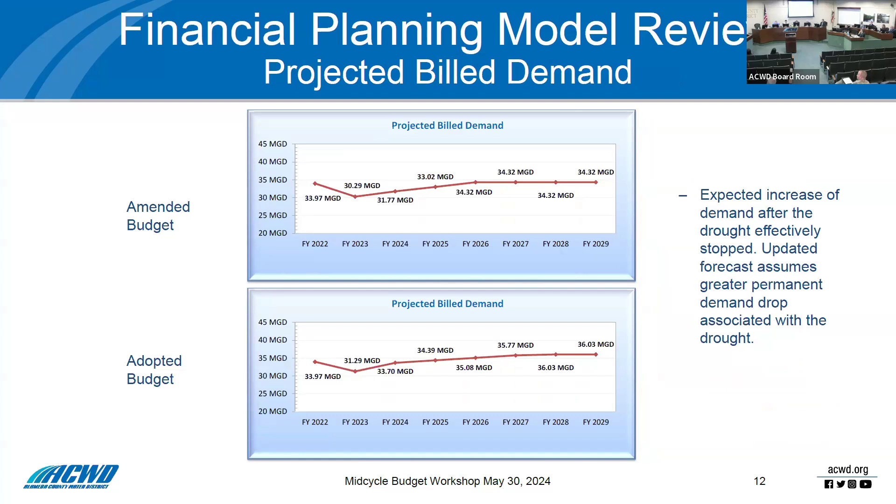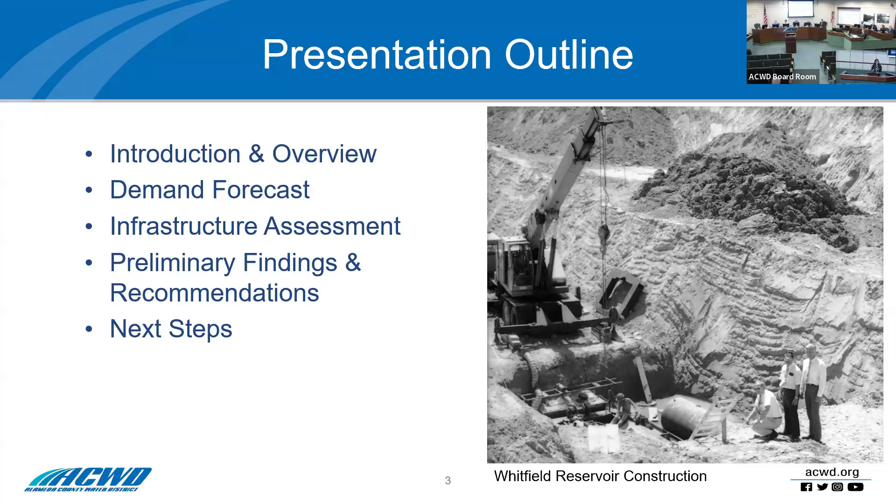Next, Rosie Chan will walk us through the supply-demand gap analysis, our infrastructure planning process, and our preliminary findings and recommendations of the engineering report. We conclude the presentation with some proposed cost packages and next steps.

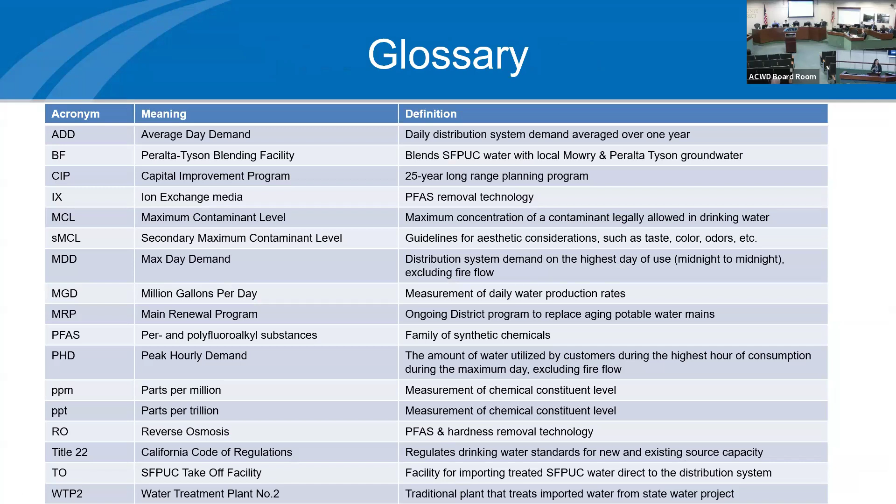The main purpose of today's presentation is to provide a transparent view of the engineering analysis and draft project proposals and their associated costs. It's important to note that not all projects included in today's presentation are included in the CIP recommendation we brought to the board last week. After a thorough financial evaluation, only approved projects will be incorporated into the future CIP.

Today's presentation also includes review of our infrastructure planning criteria, which is really driving our project selection and prioritization of projects. We will be upfront with the associated costs for each of those projects. Our goal today is to provide complete transparency about the proposed projects and their costs associated with the findings of the engineering analysis.

The engineering report is a snapshot of our current capacity constraints, which is primarily focused on the near term, a 10-year horizon.

The engineering report fits within a larger planning process. We have a planning portfolio process which includes several planning documents: the asset management plan, our main renewal program, water resources master plan, and our 5-year strategic plan. All of these inform the engineering report and look at a longer term outlook.

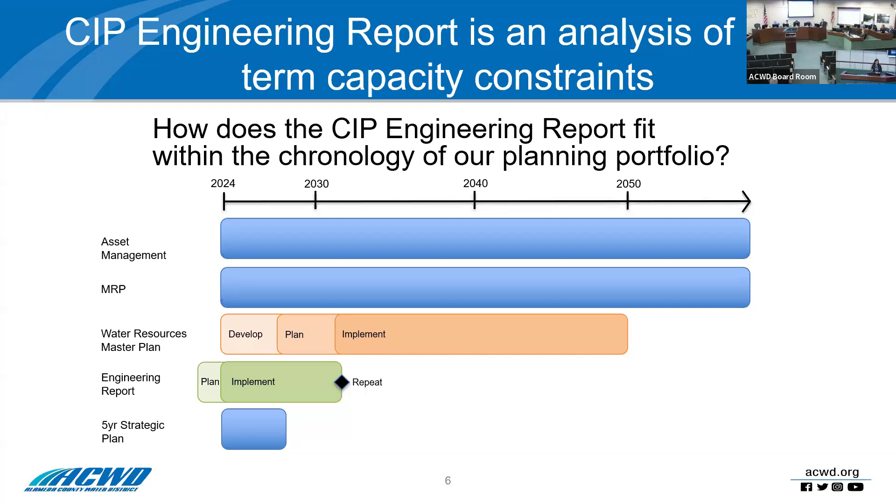I'll provide a quick overview of the scope of the interim CIP engineering report. This interim report is focused on detailed analysis of current and projected infrastructure needs across various aspects of the water supply system.

More specifically, we are focusing on 4 facility types: production facilities, storage facilities, pumping and boosting facilities, and transmission mains. As we go through the analysis, you'll see different sections focused on these 4 facility types.

We also looked at our demands. The report considered capacity - the current capacities - with 10% contingency for the demand in the next 10 years, and with water quality considerations.

The infrastructure needs to be able to withstand disruptions and provide continued, reliable water supply to our customers. With that in mind, this engineering report also evaluated resiliency under normal operation and redundancy scenarios for outages to major production facilities or water supply sources.

As we go through the analysis, you'll be able to see the resiliency options under normal operation and a couple of redundancy scenarios. This report identified gaps between current infrastructure and our projected needs over the next 10-year duration.

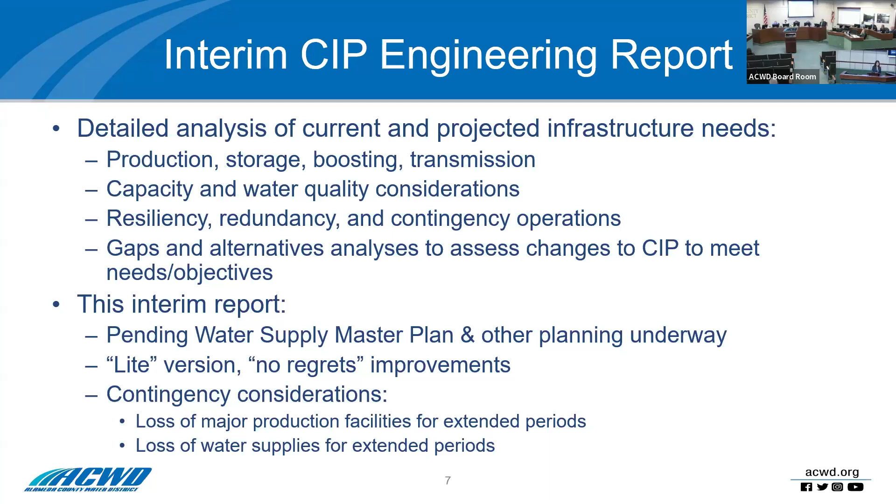The first step in the process is criteria development. There are 2 groups of criteria: regulatory and district non-regulatory criteria. During this step, we review prior engineering reports, relevant documents, references, and acquire stakeholders' feedback to understand current challenges.

The next step in the process is gap analysis. During this process, we collect necessary information and perform the preliminary supply-demand gap analysis. We additionally perform feasibility analysis for redundancy and reliability scenarios.

During the gap analysis, we identify various production scenarios for hydraulic modeling analysis, which is the next step in the process. The hydraulic modeling is then used to make sure demands are not only met quantitatively, but also geographically across all the pressure zones within our distribution system.

Hydraulic modeling uses the various production scenarios developed from gap analysis and models the results. Based on the hydraulic modeling results and gap analysis, we identify the CIP improvements needed to meet the demand.

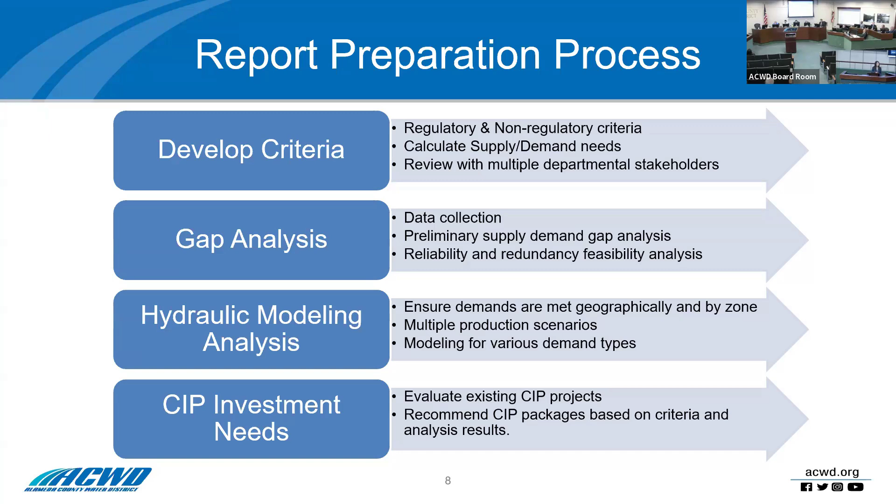So as I mentioned earlier, there are 2 groups of criteria being developed. Regulatory criteria are based on Title 22, which include max day demand. Title 22 requires the public system shall have the capacity to meet the max day demand at all times. Peak hourly demand, the PHD, Title 22 requires systems with 1,000 connections or more to meet 4 hours of peak hourly demand, but the PHD can be met using storage or emergency connections. Additional regulatory criteria include fire flow and minimum operating pressures in the water mains.

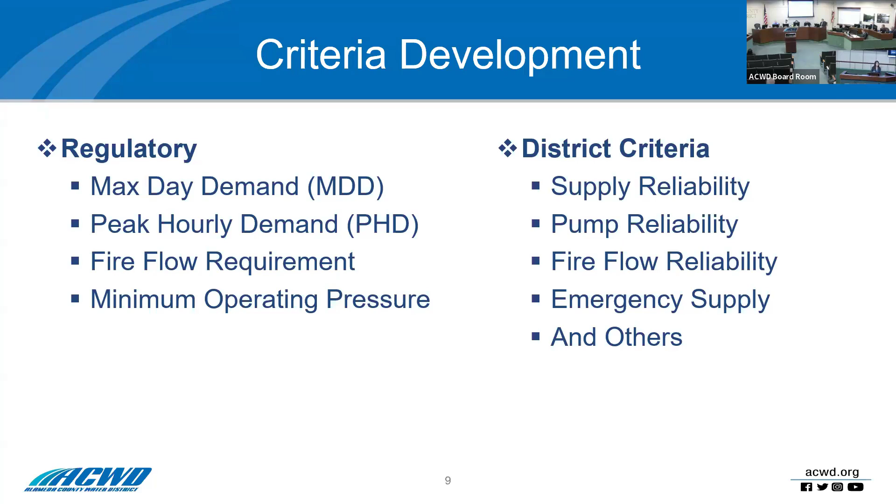So non-regulatory criteria are district ACWD internal criteria based on level of service goals. We'll look at these various district criteria in the next slide. Any questions? So here are the ACWD internal criteria.

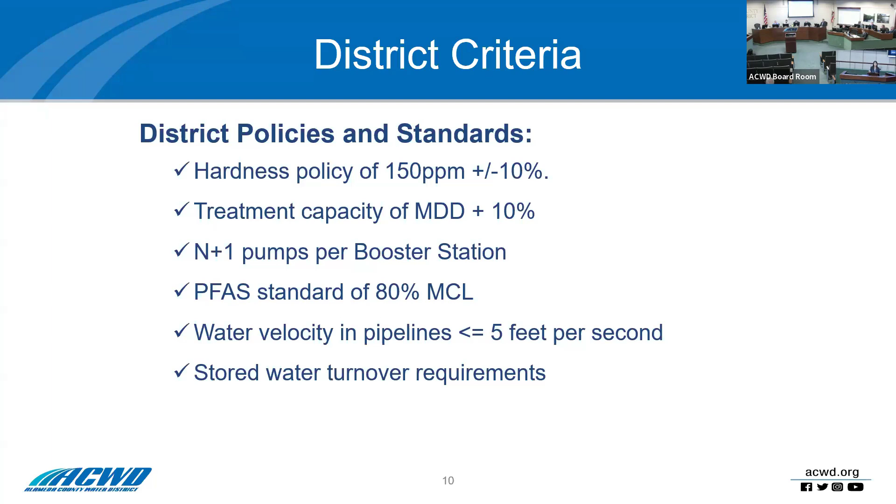The ACWD criteria are based on district policy, standards, and guidelines. These criteria include hardness policy — we have to stay within 150 ppm plus or minus 10% tolerance. Treatment capacity: we have to meet MDD plus 10% district contingency, maintaining one pump on standby at all the booster stations for emergency. We have to meet 80% of PFAS MCLs. All of our water mains shall have velocities no more than 5 feet per second. Our storage facilities shall maintain a turnover of no more than 7 days, and time-of-use pumping for energy cost savings. These are all the major internal criteria for ACWD.

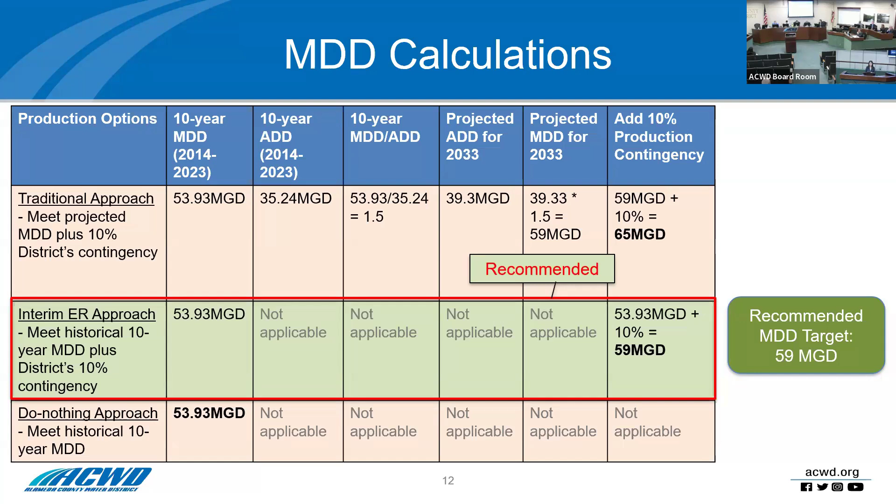Okay, no, fine. Thank you very much. All right, thank you. Let's keep moving on.

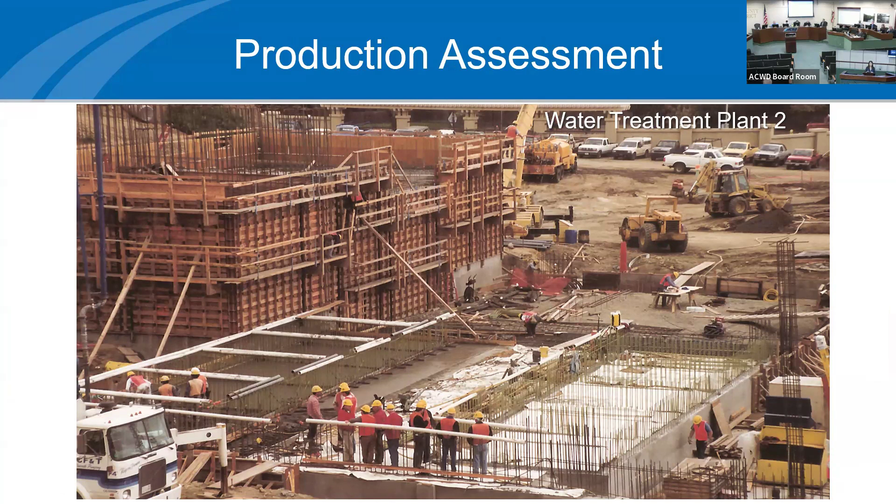So this presentation, the assessments are broken down into 4 major facility types. The first facility type is the production facilities. We'll take a look at the production facilities assessment in the next few slides.

Design capacity is the rated capacity of a production facility as described in the permit and amendment document. Contractual output means maximum available output according to the water supply agreement — for example, our daily maximum capacity we can take from San Francisco is 24 MGD. Sustainable output means the operationally proven production that can be maintained long-term, or in other words, the production rate a plant can sustain without causing any issues.

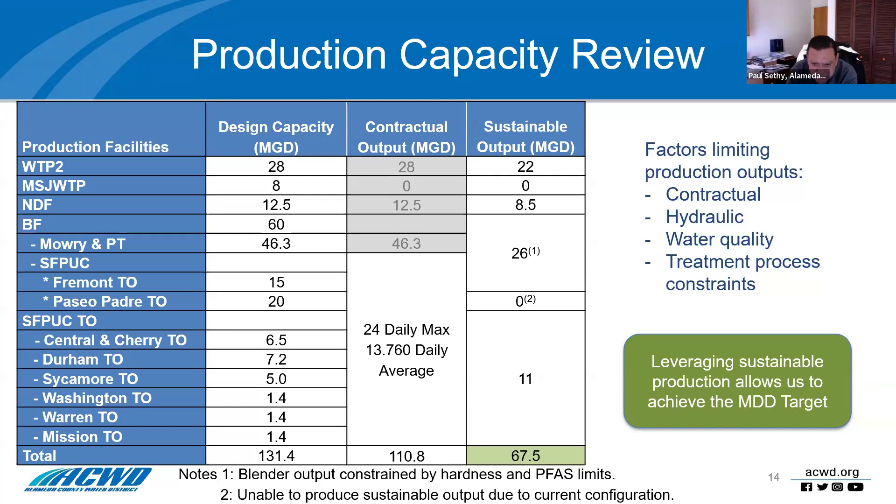I have a brief comment, Rosie, just because believe it or not, this comes up here once in a while. I want to emphasize on this slide you see, for instance, 22 MGD as the sustainable maximum output of water treatment plant 2. Just to drive home that we could not operate TP2 at 22 MGD continuously, even though it says sustainable. The littlest things, like a taste and odor event or algae in the source water, always require adjustments within the plant. We've got to increase our ozone concentration relative to plant flow. Things like that, those operational adjustments are done all the time, along with maintenance on solids handling processes. So that's the maximum sustainable output we'd gear up for a maximum day event, but we can't run that plant continuously at 22 MGD. These numbers are not cast in stone.

All right, thank you. I'd also note that your hardness criteria of 125 is below the MCL criteria, so that's another point of flexibility. Hardness is 150 plus or minus 10%. Yeah, and there's no MCL for hardness, it's an aesthetic thing. That's why we have to set our own internal standards related to keeping a uniform hardness across our service areas, something that's aesthetically as good as we can make it. Since we're looking at peaks, it's an issue, it's not the average or mean. Thank you.

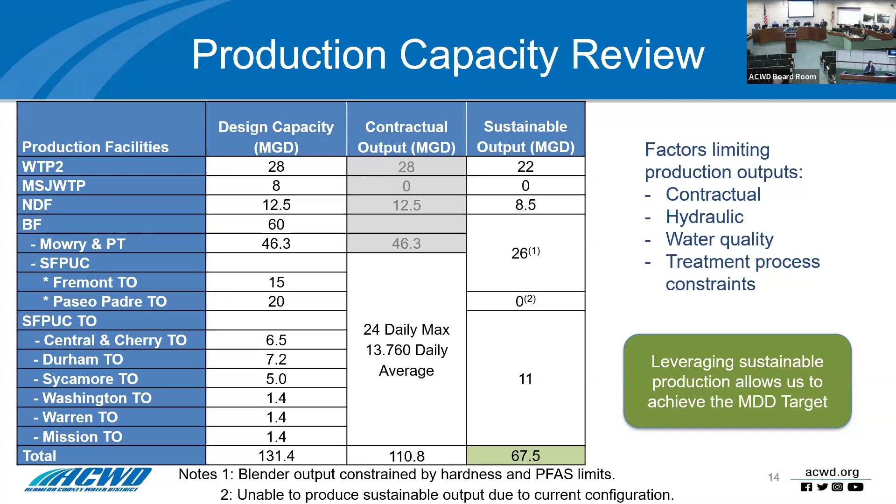All right, moving on to the next slide. So you saw the sustainable output for all the production facilities. Here, this slide shows the combination, the most cost-effective combination with all these production facilities combined. I also mentioned earlier that the blending facility can range between 21 and 26, depending on what San Francisco hardness is coming into the blending facility. Our objective is to meet the 59 MGD max day demand, stay below the hardness policy, and meet the MCL for PFAS regulations. These are our goals. With that in mind, the important thing to note is that we will be able to meet max day demand of 59 MGD under current conditions. But I do want to review why I said 21 MGD for the blending facility, limited based on San Francisco hardness.

So this slide we'll take a look at. I'd like to take a few minutes to walk you through this graph. The three vertical bars represent three feeds into the blending facility. San Francisco supply is shown in blue, local groundwater well supply is shown in red, and green means ion exchange treated well supply. The green bar is consistent throughout all combinations because we're assuming 6 MGD of ion exchange treated well supply is available. Each combination is labeled 1 to 5. The scale on the left is hardness in milligrams per liter, the scale on the right is flow in MGD. The horizontal dashed red line is our hardness target, 150 ppm plus 10%, that's district policy. The three slanted lines represent total blended hardness with various San Francisco hardness levels: 20 ppm in orange, 80 ppm in red, and 120 ppm in blue. There are many different blend ratios and combinations to produce 21 MGD from the blender. However, any combination beyond number 5 exceeds 80% of the PFAS MCL, so they're not feasible, that's why I grayed those out. The only options we have are combinations 1 to 5.

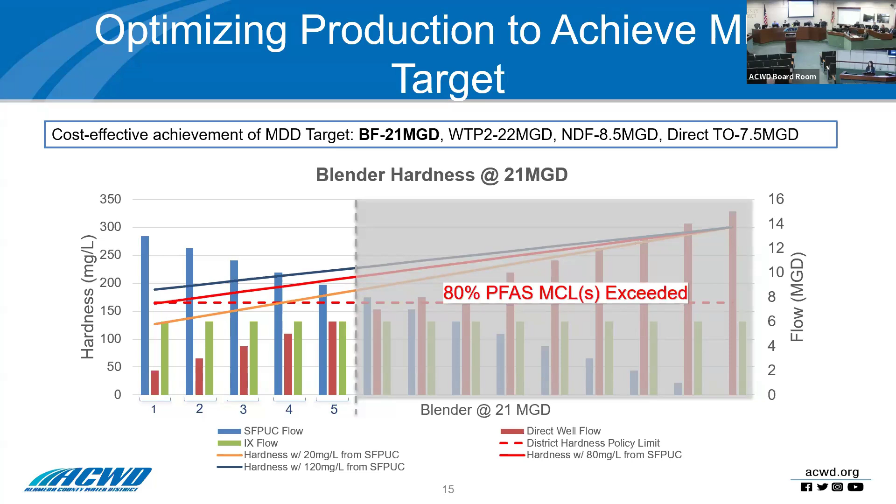All right, thank you. Moving on to the next slide. There are no other questions.

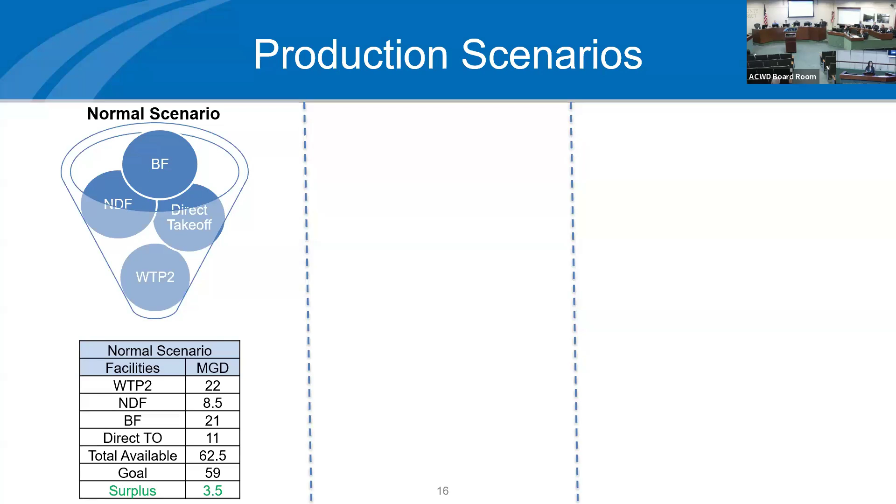We expand our analysis to look at redundancy scenario number 1, without WTP2, as shown here. If we lose WTP2, total sustainable output from remaining facilities decreases to 40.5 MGD, so there is a deficit of 18.5 MGD. Our goal is 59 MGD for max day condition. The scenario shows we will not be able to sustain our demand if it goes above 40.5 MGD without WTP2. Any number of days that demand exceeds 40.5 MGD is how many days we will not be able to meet our demand without WTP2.

So for the last 10 years, I took a look at the data, and the number of days that we have exceeded 40.5 MGD for the most recent couple of years was about 179 days in a year. So just to give an idea of how many days we are looking at an extended outage for TP2 under this scenario.

The redundancy scenario number 2 is if we lose desal. If we lose the desal plant, our sustainable output drops to 43 MGD, if we're not counting the direct takeoff supply. The objective of this scenario is to optimize our SBA supply, not the San Francisco supply, which is why the direct takeoff bubble is outside the bucket and not included in this analysis. Our goal is 59, therefore our deficit is 16 MGD. If we want to include direct takeoff supply from San Francisco, then our deficit will be 5 MGD.

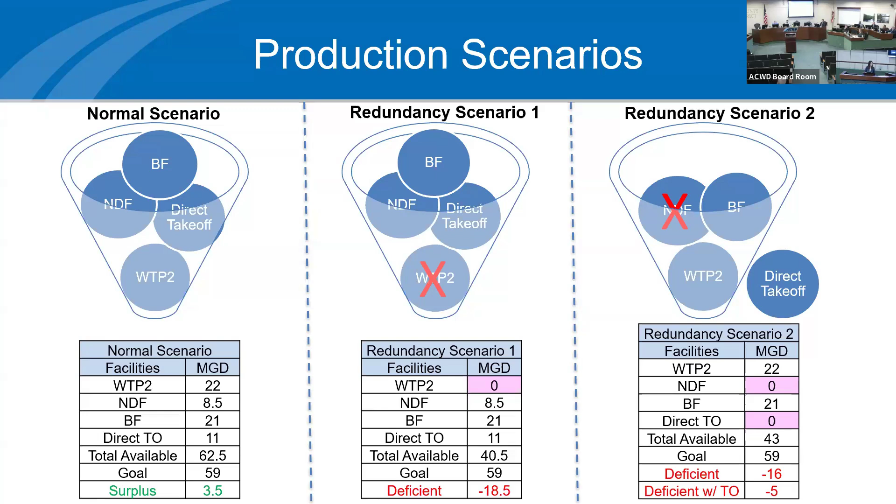So we want to take a look at redundancy scenario 1, without WTP2. You saw in the earlier slide that we will not be able to meet our demand if we lose TP2. This slide reviews what improvements we need to make and what kind of contributions from remaining facilities are needed to make up the deficit of losing TP2 to meet our 59 MGD demand. There are many different ways to mix and match our production facilities to produce 59 MGD. However, our focus here is to optimize San Francisco supply and our local groundwater supply. With that in mind, we are showing 3 different options here.

Remember, the objective is to meet the demand, stay below the hardness limit, and stay within 80% of the PFAS MCL. Under the current conditions, shown in pink as row number 1, we have to increase our blending facility to 40 MGD in order to meet our 59 MGD demand if we lose TP2. So all 3 lines show the blending facility coming in at 40 MGD.

With option 1, line number 1, considering current conditions, we will be able to meet our demand, but our hardness and PFAS - the driver here is PFOS, so I show PFOS as the one constituent - are both exceeding the limit. So option 1 is not feasible.

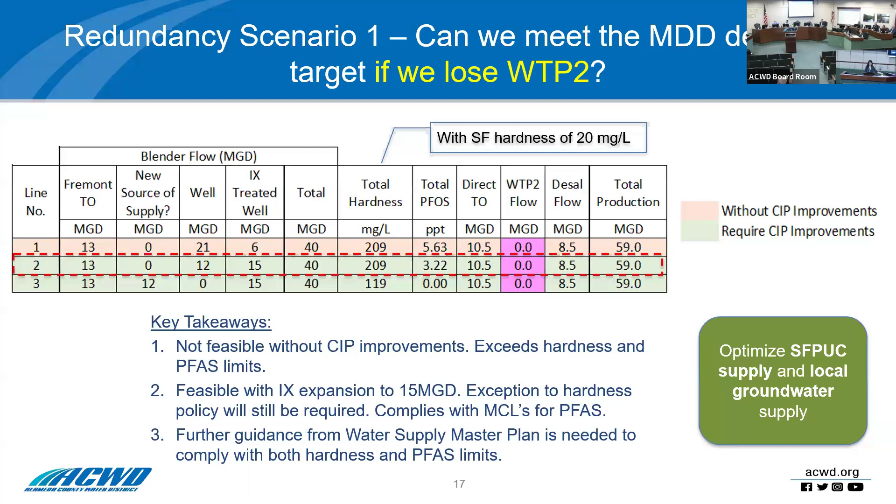All right, now let's review the redundancy scenario number 2. If we lose desal, what will it take to produce 59 MGD and still meet the hardness and PFAS requirements, and meet the demand? As you can see from here...

Immediately we cannot produce 26 MGD from WTP2, so this is not feasible for all these options shown here. As mentioned earlier, there are different ways to mix and match, but our focus for this scenario is to optimize the SBA supply and local groundwater supply. That's why we are not counting any of the available direct takeoffs or San Francisco takeoff facilities.

Total blender output is increased to 33 MGD if we lose desal, to supplement the loss of production. All three options, as mentioned, are not feasible today because we cannot sustainably produce 26 MGD from WTP2 without making WTP2 process improvements.

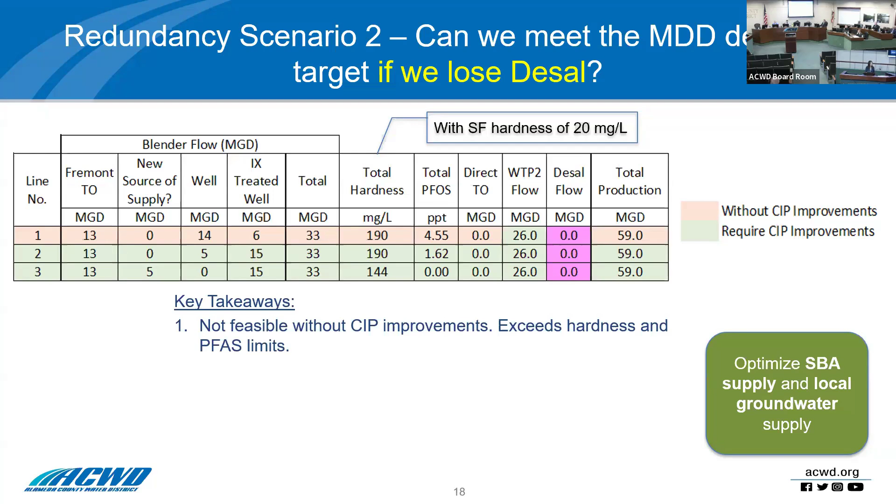Line two helps us meet the PFAS MCL, 80% PFAS MCL, by expanding the ion exchange treatment plant to 15 MGD. But line two also exceeds the hardness limit, and this is with San Francisco coming in at 20 ppm.

Similar to the previous scenario, line three shows that if there is a new source of supply which has no hardness and no PFAS, then we'll be able to meet hardness and PFAS. However, this option requires further guidance from the Water Supply Master Plan.

All of these options require WTP2 process improvements. Option two is our most viable option for this interim engineering report because it allows us to utilize our existing water supply portfolio to meet demand for the desal outage scenario. However, we will be exceeding the hardness limit.

Does that make sense? Yes. At one time, we had a blending plant, the largest blending plant in the Western United States, at the well field.

Have we considered a dehardening facility, possibly in tandem with our ion exchange, so that the product water would be lower hardness?

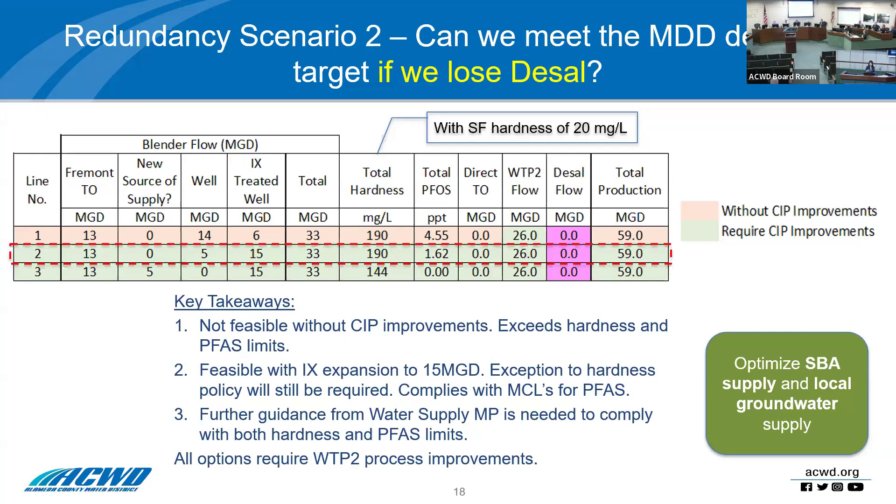Going back to this diagram we saw before, summarizing our findings: in the normal scenario, we'll be able to meet 59 MGD max day demand, comply with hardness, and stay within the 80% PFAS MCL. However, this normal scenario requires all facilities running at their sustainable output, so we have little flexibility.

For the redundancy scenario, we saw that we're able to meet the demand. However, we will not be able to meet the hardness, and we will not be able to stay below the 80% PFAS MCL.

And for redundancy scenario two, if we lose desal, we do not meet MDD, 59 MGD max day demand, without making process improvements at TP2. We will not be able to meet our hardness policy targets, and we do not meet PFAS MCL without ion exchange expansion. So the next slide will give the summary of all the recommended projects.

Under normal scenario, there will be no CIP improvements recommended. Under redundancy scenario one, if we lose TP2, we'll need ion exchange treatment expansion to 15 MGD, and either take a hardness exception or policy exception, or look at alternative analysis for hardness control. Under redundancy scenario two, if we lose desal, we will need WTP2 process improvements and ion exchange treatment expansion, and either take a hardness policy exception or look at alternative analysis for hardness control. These are the summary of recommendations for all three scenarios presented here.

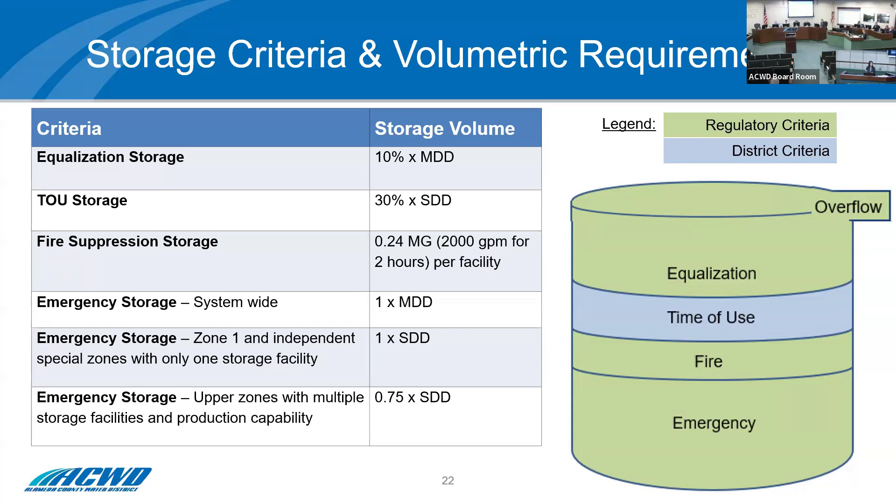From our engineering analysis, we saw that all zones have adequate storage capacities with the exception of the Appian zone. Appian zone does not have sufficient equalization storage nor time of use storage. The total deficit in the Appian tank is 0.23 million gallons. So moving forward, our plan is to perform a comprehensive review of the Appian zone and re-evaluation of redundancy and reliability needs for individual zones as well as the subzones.

Any questions before I move on? So bottom line is, currently we have a deficit in the Appian zone.

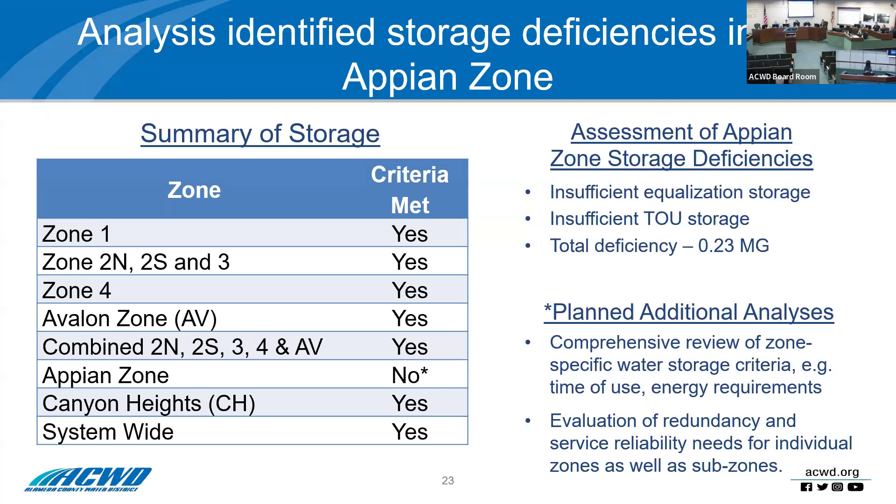Our engineering analysis not only looked at storage capacity requirements, we also looked at water age requirements. One of the criteria for storage facilities is to maintain a maximum turnover of 7 days. We have been experiencing some water quality issues at our Patterson Reservoir, and therefore we have used hydraulic modeling analysis to come up with a solution to address this high water age issue. In the next slide, we will take a look at the hydraulic modeling result to address this issue.

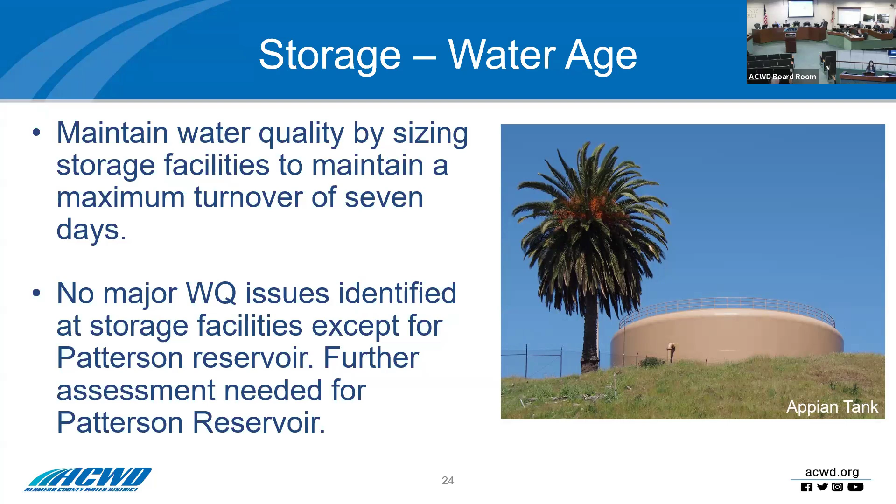Here is the hydraulic modeling analysis. The solution recommended from the modeling is to add a low head booster pump station to address the high water age at Patterson Reservoir. This graph shows the solid blue line, which is our current base condition, and with the improvement, we will be able to improve our turnover to approximately 2 days, represented by the dashed blue line in the graph.

In the map bottom right, the map shows the pipeline improvements in red, but this pipeline improvement is already reflected in our existing main renewal program. Any questions on this hydraulic modeling analysis result and findings?

Yes, one question from Director Sethy: Is the low head booster pump station internal in the reservoir, or is this something external? It will be external, but we'll have to do the scoping and study for the project. Are you recirculating water, like there's water coming into the booster station and then exiting back into the base reservoir? Is that the way it works?

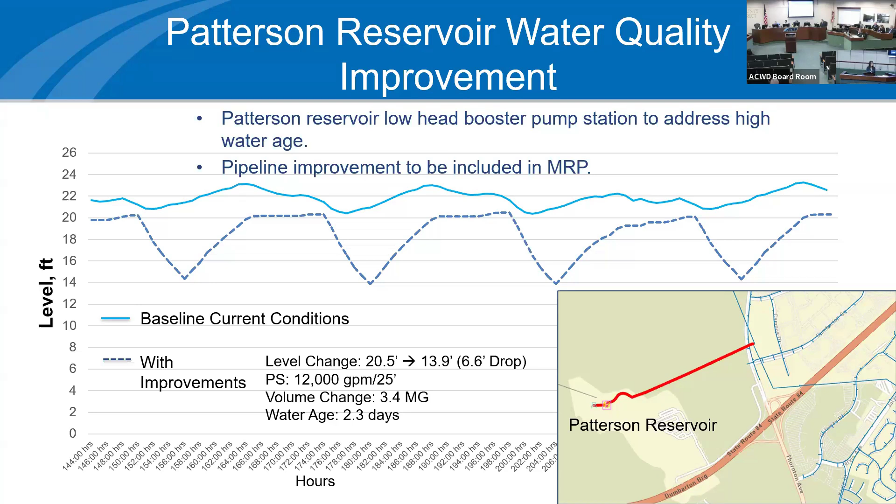All right, so the next slide will look at the storage facilities findings and recommendations. All pressure zones have adequate fire suppression storage, emergency and equalization storage, with the exception of the Appian zone, where we'll have to do further analysis and investigation to determine the deficit in the Appian tank. The recommendation is to install a new low head booster pump station to address the high water age at Patterson Reservoir. This summarizes our findings for storage facilities.

Just a quick note for the record, because you see the word emergency and see Appian doesn't have it, it's lacking. Just to confirm for the record, you saw all those layers of different criteria for storage. Emergency is one of them, and there are a couple of different types of emergency storage. The tank has adequate capacity and meets all the regulations and so forth. But what we're really talking about is when we add our own additional belt-and-suspenders criteria to optimize things like equalization and time and water available for time-of-use pumping, to avoid additional energy costs and so forth, under the higher demand conditions, we're close to the bubble.

You saw Rosie's assessment about a 230,000 gallon delta, which is really small for storage like this. So that's why she suggests it's now time to take a close look at Appian to see whether our own imposed criteria related to time-of-use pumping makes sense. At 30% of the total reservoir or tank capacity, does it make sense in this one tank, given how the demands in that zone actually work? If it was 28%, would we still have adequate margin to stay out of peak pricing, energy pricing times? That requires an additional level of detailed review, and that's what she's reflecting. She's not saying that we can't sustain an emergency in that zone at all.

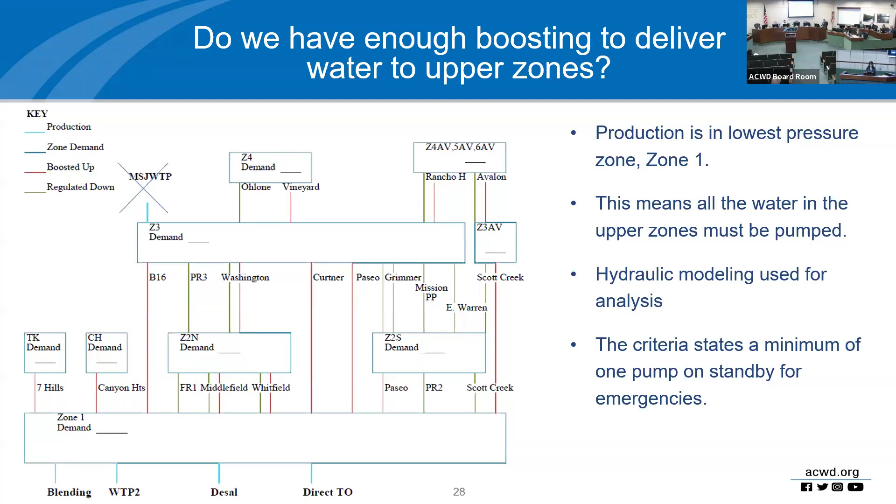All right, so the next major facility we'll be reviewing is booster stations capacity assessment. Here is the simplified distribution system diagram. As you can see, all of our production facilities are located in Zone 1, which means all the water in the upper zones must be pumped. We use hydraulic modeling, as mentioned in the prior slide, to see how we can meet our demands across all the pressure zones. One of the criteria for booster stations is to maintain a pump on standby at all times for emergencies.

So we use this criteria in our hydraulic modeling analysis to identify the CIP improvements. The hydraulic modeling is based on various production scenarios identified during the gap analysis, and based on the results, here are the recommended findings. We'll have to make some improvements in the Whitfield Zone 2 and Zone 3 area, adding additional pumps to maintain a pump on standby to meet the criteria. The Whitfield Zone 3 booster station is currently included in the current CIP, so we'll be looking at the entire Whitfield area to address this issue.

B16 was installed as a temporary booster station to pump water to Zone 3. One of the recommendations is to add an additional pump to meet the criteria and convert this to a permanent booster station that meets district standards, because B16 is a critical facility for our operations, so we'd like to convert it to the standard permanent booster station.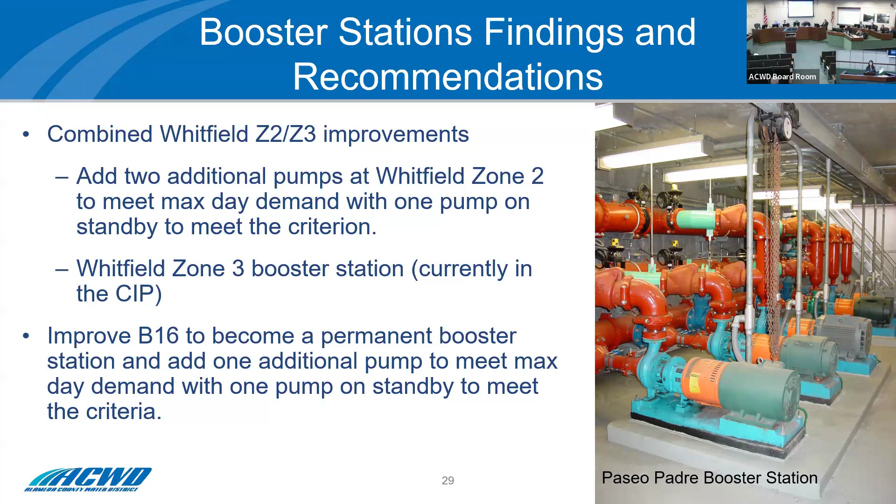So these are the findings and recommendations related to the booster stations. Before I move on to the transmission mains capacity assessment, are there any questions on booster stations?

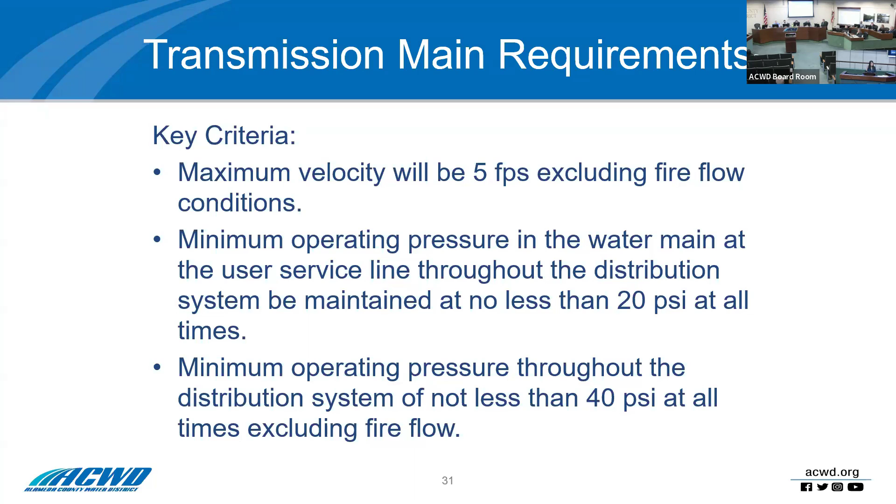All right, let's take a look at our transmission main capacity assessment. Here are the key criteria. There are other criteria, however, these are the key major criteria. Our transmission mains need to maintain a maximum velocity of no more than 5 feet per second. And our minimum operating pressure in the water mains shall be 40 PSI at all times without fire flow. These are the key criteria for our transmission mains.

So hydraulic modeling is used to see, for the normal operation scenario.

From the hydraulic modeling results, this map shows some of these pipelines that have high velocities, shown in red. These pipelines do not meet the criteria of being below 5 feet per second. However, they don't impact system hydraulics significantly. They are identified because they do not meet the criteria.

Any questions on this?

These are all for current operations. Correct. When we were talking about the IRP, a request was made that we look at what would happen if we would lose one or more of our major water supplies for 6 months or more. Has that been modeled, or can it be modeled? So yes, as part of the production scenarios, there is the redundancy scenario that was modeled in addition to the normal operation scenario.

All right, I would like to turn it over to Ms. Gunther to talk about the main renewal program integration. Thank you, Rosie Chan. So I'd like to take a moment to review our main renewal program.

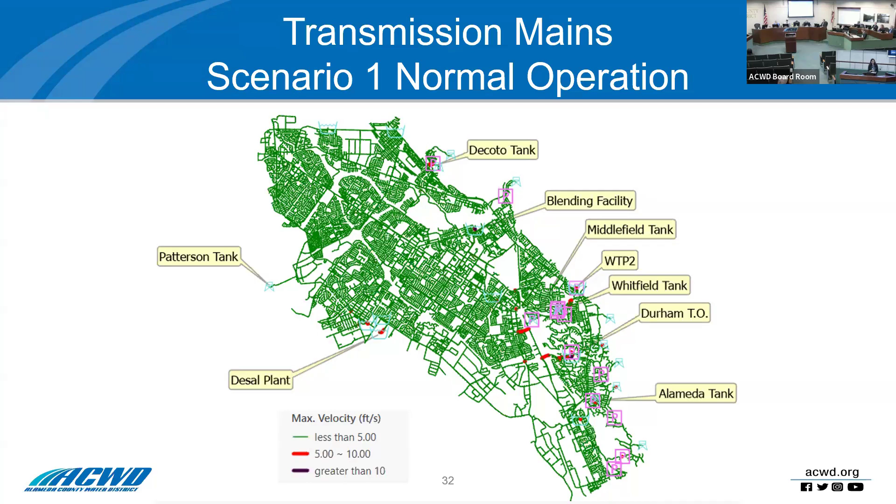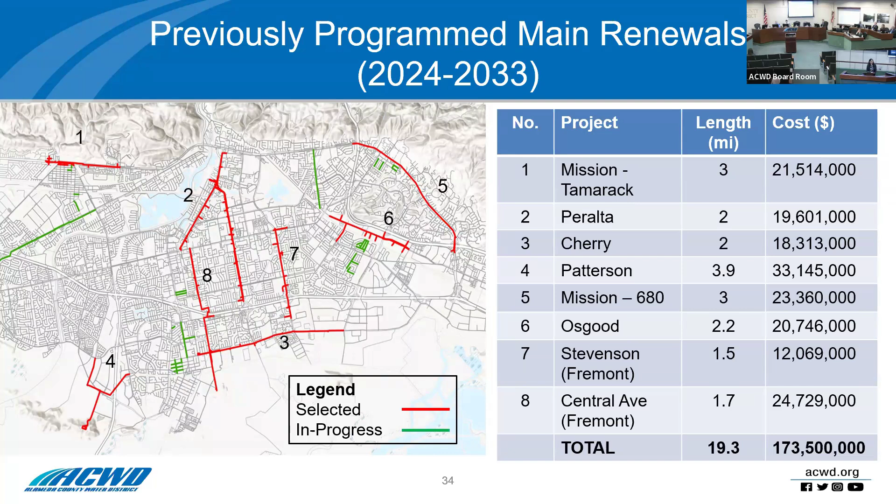So this is where currently we are focusing on the main renewal program. Now going back to the engineering report, I'm switching from our main renewal program, which is already programmed as part of our CIP recommendations, to our engineering report recommendations.

This is based on our hydraulic modeling, under normal operation, where every single facility is up and running and fully functional. These are the improvements identified based on the engineering interim report. There are some areas identified based on the established criteria of maximum velocity and minimum operating pressure of 40 PSI, with 20 PSI for fire flow conditions. Using that criteria, these are some of the areas identified for improvement under the engineering report.

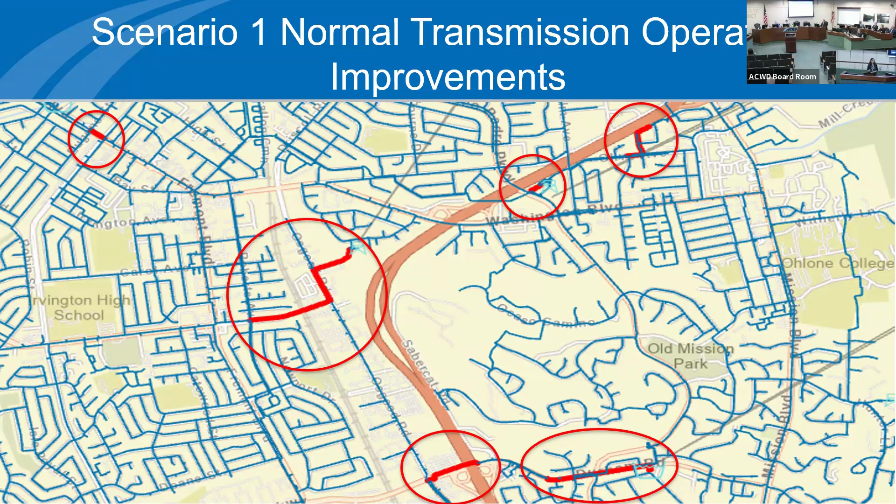As Rosie mentioned before, the consequence of deferring these projects is very low because what we would be seeing is exceedance of velocity beyond 5 feet per second, which is low consequence under these contingent conditions.

This is another scenario where we evaluated reliability and redundancy. For this particular scenario, WTP2 is out of service for an extended duration. Under that scenario, these are the improvements identified as part of the engineering report recommendations.

There are three major improvements identified under the redundancy scenario, specifically for the WTP2 outage. One is a pipeline - a new transmission pipe would be necessary, about 4 miles, shown in red on the chart, which connects the Blender facility, becoming a critical facility at that point, to transmit water from Blender to the southern part of the system.

The second improvement identified was improvements to Whitfield Zone 2. This is based on findings indicating the operating pressures are on the edge, ranging at a low operating pressure. To improve cycling of Whitfield Reservoir, as the system head is very high for the reservoir to drain, there are improvements identified for improving cycling by upgrading the pump station.

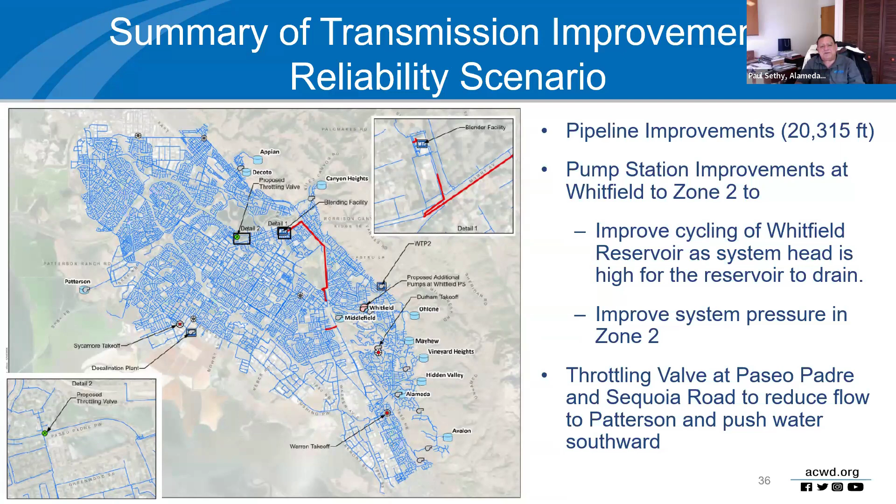With that context on the main renewal program and the improvements recommended as part of the engineering report evaluation, we have two sets of recommendations. One is under normal operational scenario. We saw some bottlenecks earlier, but those are primarily because of our established criteria, where if velocity exceeds 5 feet per second or operating pressure goes below 40 PSI, there's a problem. The consequence is very low since those only happen during contingencies, and there's a factor of safety built into the pipeline infrastructure, so it can still handle exceedance beyond 5 feet per second. The maximum we saw during analysis was up to 8 to 9 feet per second, but that's short term.

So the proposal from the engineering report is, since every pipe segment is already accounted for in the main renewal program, we'll integrate the engineering report recommendations into it. This is a two-folded approach: we take the engineering report's transmission capacity recommendations, for adding new transmission mains, adding a throttling valve, and upsizing existing mains, and combine those with the main renewal program. Currently, our main renewal program is prioritized based on likelihood and consequence of failure. Going forward, we'll consider the engineering report criteria and apply upsizing of mains, which would influence prioritization decisions. So with this approach, we'll integrate the engineering report recommendations into the main renewal program.

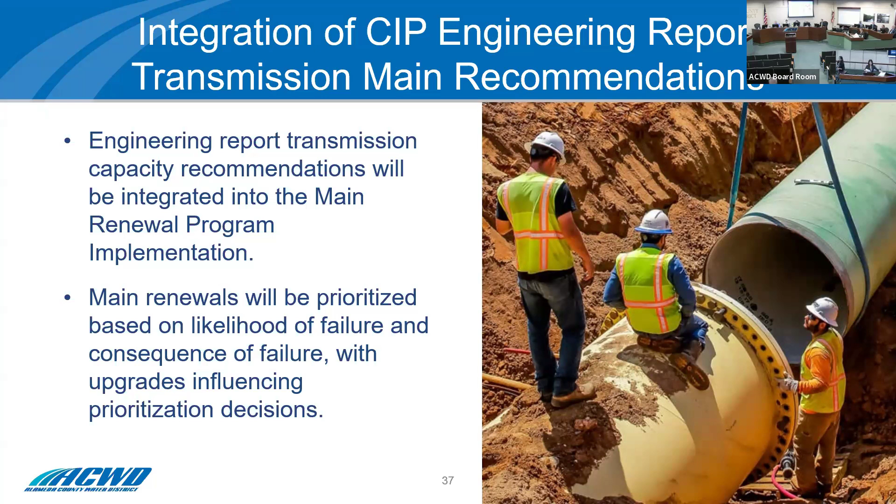Thank you, Ms. Ipokunda. So we have reviewed all these 4 major facilities for the interim engineering report. Now let's review all the findings and recommendations for all the scenarios we've gone through in this presentation.

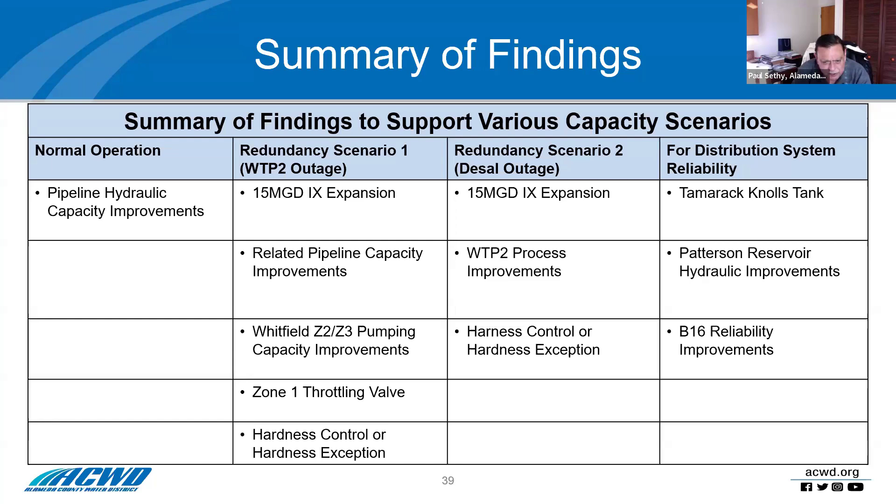Just to be clear, this is not the last slide. This is a summary of the stuff we have covered so far. We have a few more, maybe 10 more slides that show the risk scoring and the cost estimates that you mentioned, Director Sethy. So if and when Rosie continues with the presentation, you will see some of the responses to your questions. Hey, great minds think alike, right? Correct. Thank you.

All right, thank you. Are there any other questions? If not, I'd like to move on to the next slide. The next slide will review how we score each project, and what kind of methodology we use to evaluate each CIP project.

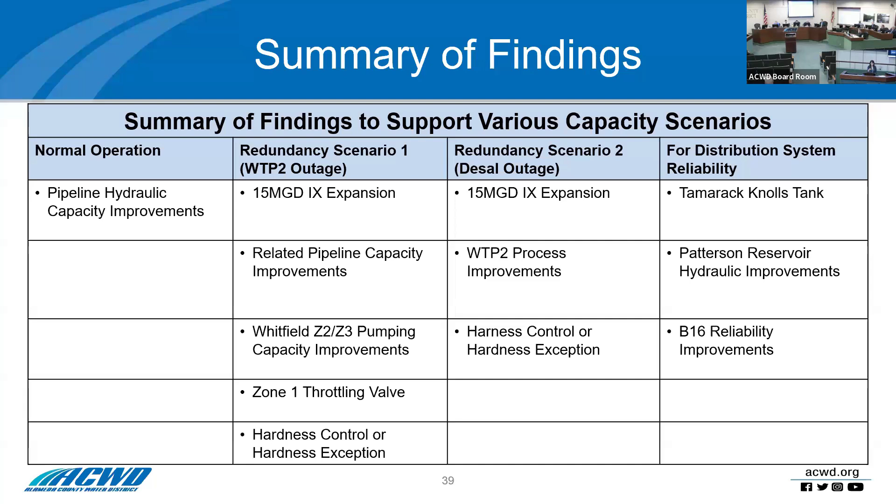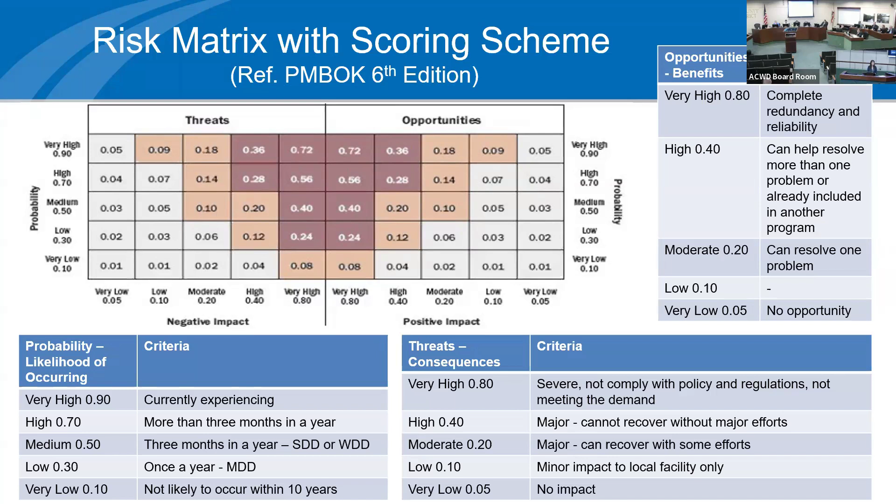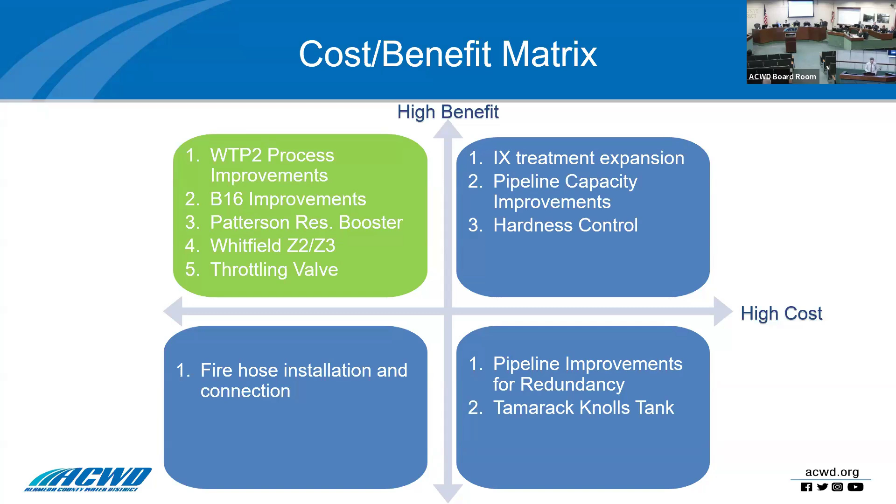So far we've seen the details of a fairly extensive technical review of our water system. Ms. Chan shared the cost benefit and skipped the whole rabbit hole between that PMBOK assessment, providing a summary of the cost benefit matrix, which will help us navigate future investment planning. What we haven't yet done for you is contextualize the costs.

So that's what I'm about to do here. I will say that these costs are preliminary and have not been included, as has been said a few times already, in the mid-cycle budget that's up for review in the June board meeting. And not to bury the lead, we have not included in our presentation our final investment recommendations or financial analysis that would be necessary to finalize the recommendations. So that's included in our next steps.

In line with the analysis you just heard, we looked at normal operating conditions as well as under outage and redundancy style conditions. So what we did with the costs is package up system resiliency investment needs under normal conditions. Next I'll show you a package for system redundancy under outage conditions, under those outage scenarios.

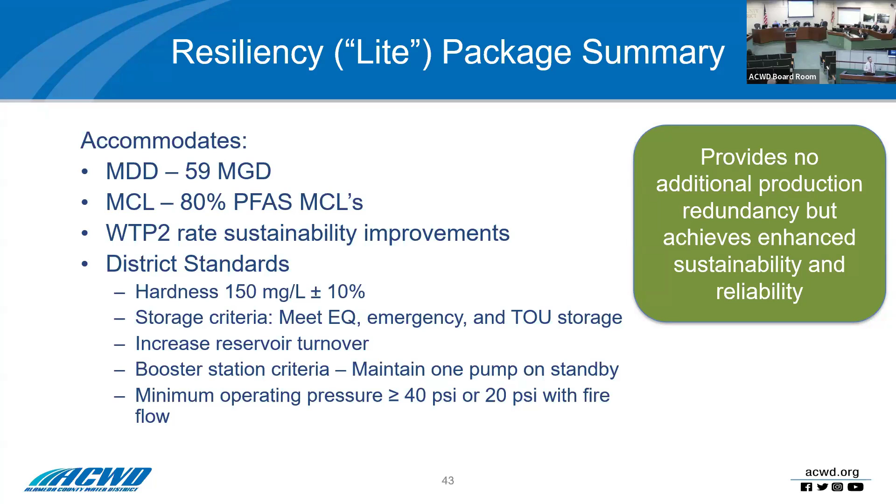So with this package under normal operating conditions, we can achieve the hardness criteria, storage criteria, increase reservoir turnover to meet that criteria, meet our boosting criteria, and meet our minimum operating pressure criteria.

Included in that package is the Tamarack Knolls tank project, which is in the existing CIP. But as Rick mentioned, that zone 2 TK, Tamarack Knolls, requires further capacity analysis and is fairly contingent on future demand factors and profiles.

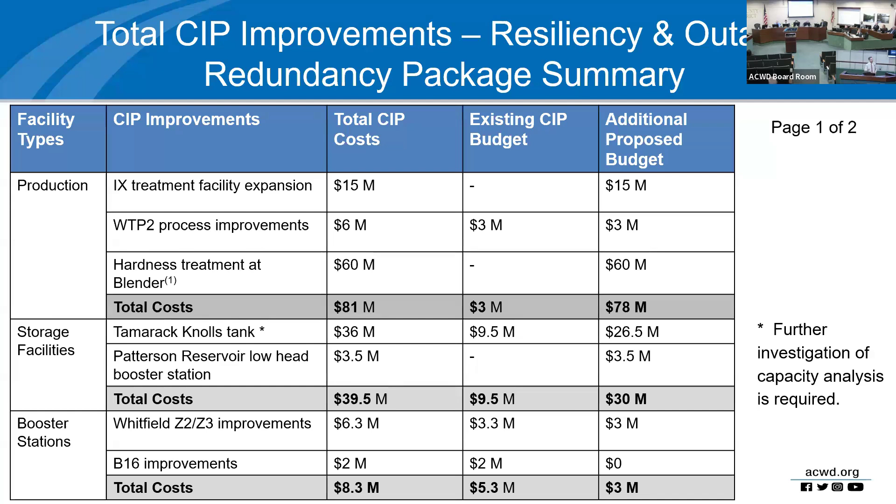The table continues to our transmission mains. You heard from Ms. Gunther, well actually I'll put a pin in the main renewal augmentation, I think that's the next slide. But under transmission mains we have the throttling valve facility here, which, as you heard, is a valve that will artificially augment the hydraulic grade in the distribution system to help us push water south under certain conditions, under these outage redundancy conditions, as well as some emergency preparedness minor improvements.

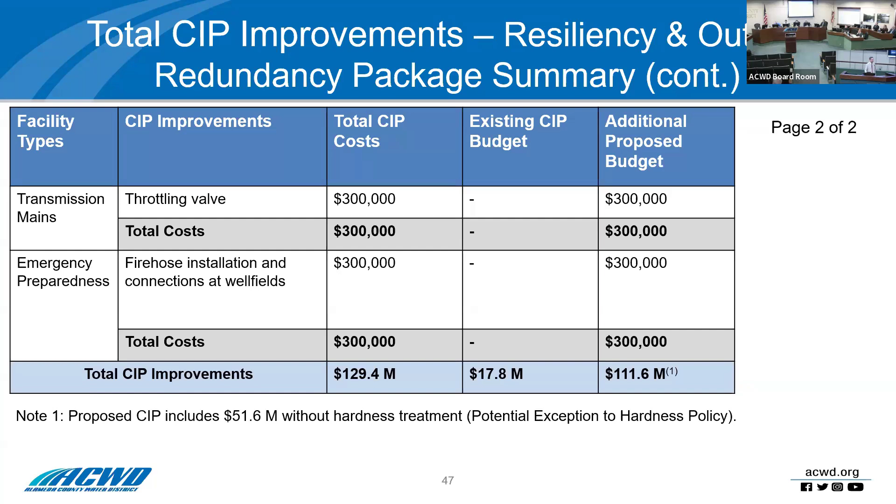So the total there of additional proposed budget is $111 million, but that includes $60 million for an RO facility, just because we thought that would be a familiar number and style of solution. I don't think we're recommending that as the hardness control solution. We're sort of deferring that to future work that the district is doing. So that leaves us with, I wanted to underline, the $51.6 million is the number without that RO facility that's required for this package.

So the main renewal program, we already have that main renewal program. It has its ramp up built into the CIP already. There's some augmentation required, and certainly that augmentation is for capacity improvements that we've identified through this process. Of course, those projects would have to be done open cut. You can't line and improve the capacity of a pipe. But this is an incremental cost, assuming open cut trench, a main renewal. This would be the incremental cost to upsize those mains, is what you see in the first line.

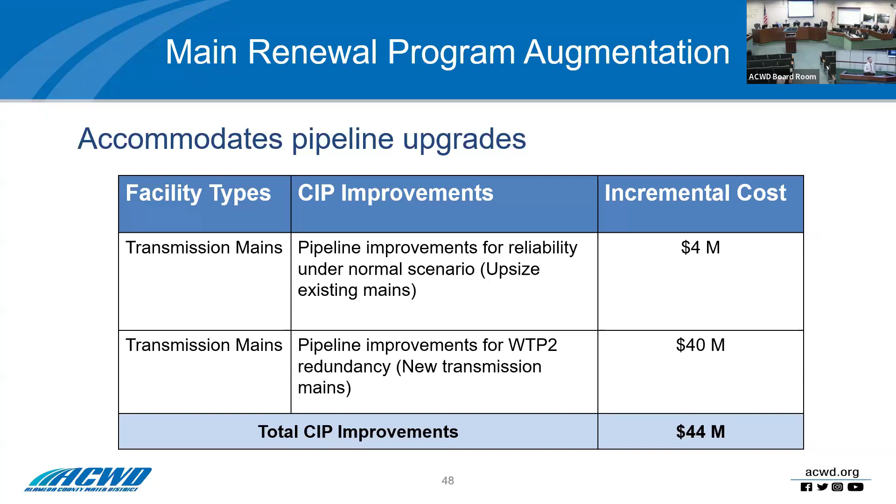On the second line there is a brand new pipeline. That's a new transmission pipeline that we went through from Blender to move water south under those conditions. That's only triggered under the WTP2 redundancy scenario. For a total of $44 million that would need to be added to the main renewal program.

Okay, so hopefully that helps contextualize the cost impact of some of the findings, of the draft findings in our preliminary analysis. I think I already mentioned the next steps are to finalize our engineering report documentation, certainly to receive input from the board to help guide us to get from our draft findings through to a final set of recommendations. As I mentioned, not included in our analysis so far, which has been focused primarily on all the technical aspects, is the financial assessment of these recommendations and those costs. And then, of course, those costs would be included in a future CIP.

So that's what we have in front of us from here through the finish line for the engineering report. And with that, that concludes the presentation. And so, President Gunther, I'll turn the mic back over to you.

We have some more going already. What's that? That's not the end of the show today. Oh, well, that is the end of this item. We've got a couple more things on the agenda, but yeah, this is the end of this item. Okay.